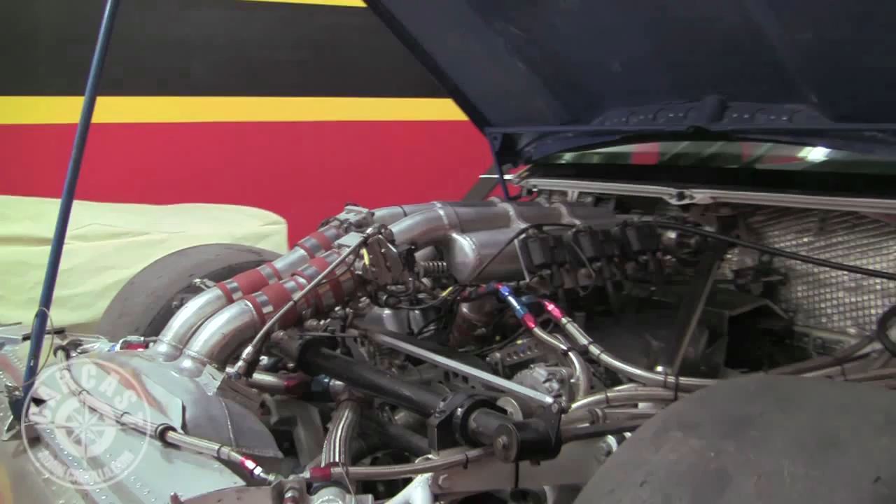It scares me because I'm picturing it start up. But you did a leak down test on it already, right? We did compression leak down. We wanted to get an idea of the condition of everything before we hammered the hell out of it on the dyno.

What do you think? How'd the leak down work? Compression's a little bit low. We have a lot of leak down on one bank. Passenger bank's got a fair amount. Wow, there's no passenger in the car. Well, as long as the driver's side is cool. Driver's side's in good shape.

Yeah, so the leak down works. I've never done a leak down. You take the plugs out. Yeah, we pull all the plugs out, open up the throttle plate, bring the piston to top dead center at the rockover point. We pump in 100 pounds of pressure, and it'll tell us the leakage. In this case, we had a few cylinders over 40% leakage. Then you determine if it's going past the rings, into the exhaust, or through the intake. At this point, we've got a little bit past the rings and mainly the exhaust, so we need some head work. So there's exhaust valve problems.

Yeah, I'd guess that mainly on one bank. Yeah, one bank's the worst. So if you were to give this engine a percentage, 100% meaning freshly built, rings tight, valves great, everything's great, what would you say this engine is at? I'd probably say you're in the 60% range.

60% range. Now how often do you test an engine and it's down like that? Nothing comes off 100% usually, unless it drives straight from the dealership. Even then you'll experience about 5 to 8% loss on a new motor. So I wouldn't worry too much about that. But it depends on how much it's raised, the RPMs, where it's set up, how it's tuned. There's a lot of variables that come into play.

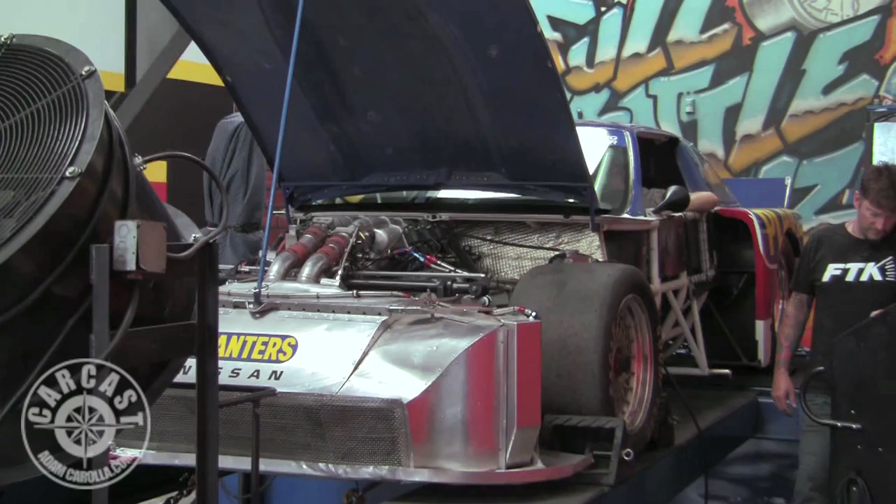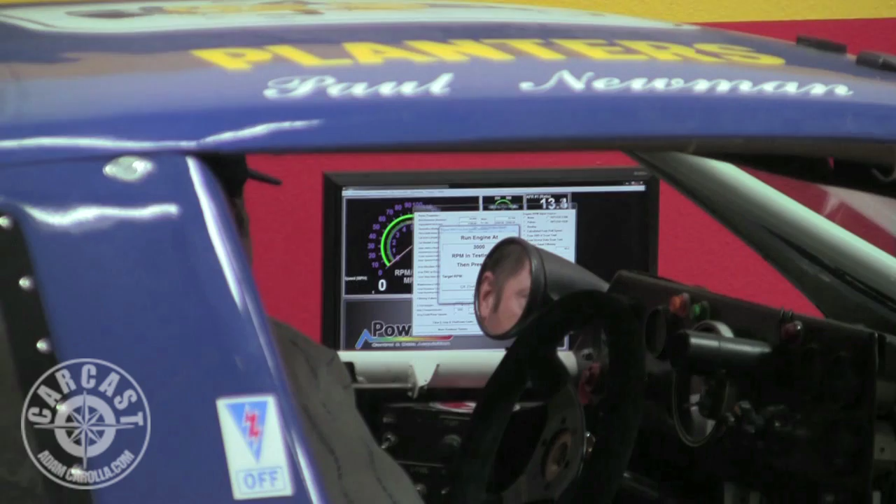It was acting rich, but it's actually lean at idle. That's why it fights you. You see it's 13 and a half, we should probably be around 12 to 1 right now. That's why sometimes when it's too fat or too lean at idle, it'll act the same way. Right now we can actually set it to 3,000 RPM.

I'm actually going to bump that to 3,500, so I want you to take it to 3,500 on your tach and hold it steady. Yeah, and then I'll lock it. By the time it comes down, the temperature will probably be good for a pull.

Well, you gotta drive it, fourth gear. What gear? Fourth. We're gonna match the two. Oops, the clutch is on the left side.

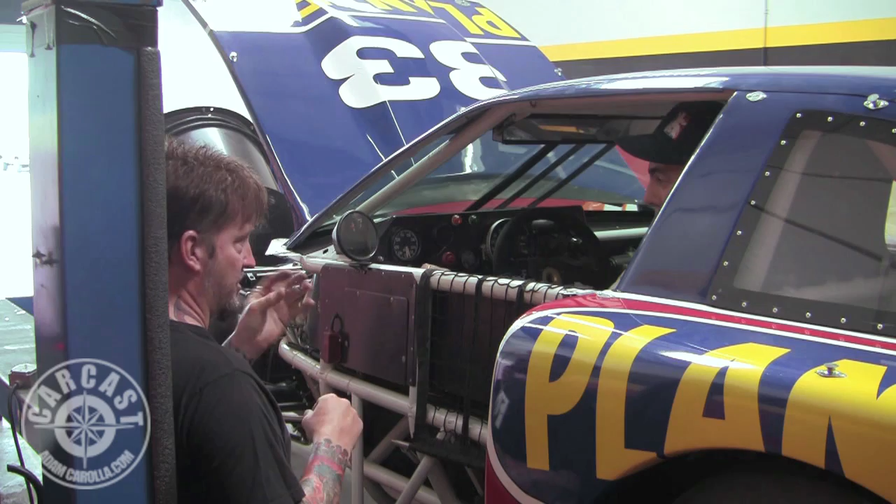It made 305 horsepower. 305, big numbers. We're going to run it to 7,500. Try to get it a little closer to 2,000, we started that one around 2,300. If we can get it to 2,000-ish, 2,100 with a little bit of throttle, I'll give you thumbs up, then you go wide open throttle.

Alright, let's try it again. Okay, you get going.

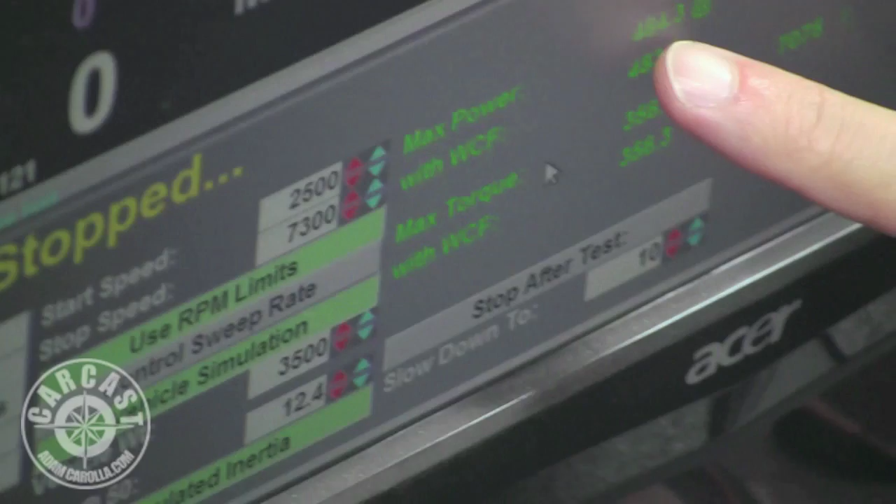If you look at your tune...

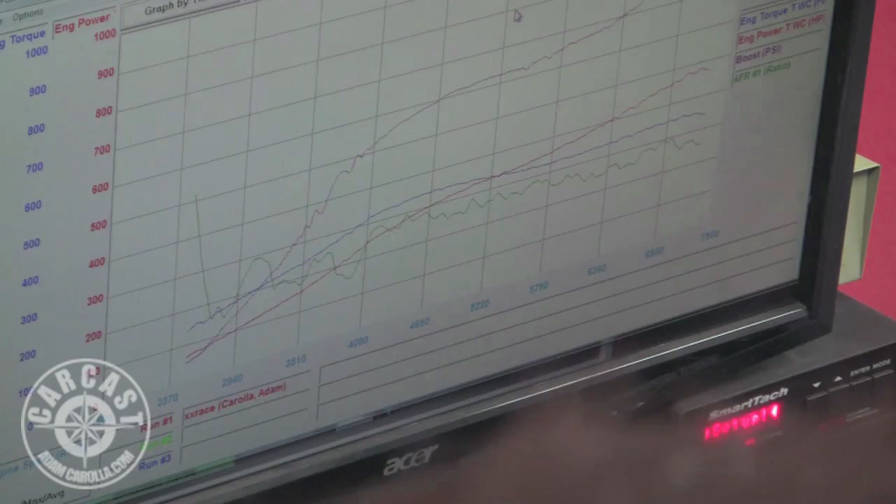See, I like to look at raw data. You can kick that switch off, there'll just be a little smoke in here. Fucking car, scary, right? It is. I don't mind it on the track, just standing in one place is scary. You feel like you're gonna launch right off of there. I don't know, it's disconcerting. It's all right, you got the chocks in? Little rubber chock, you're good.

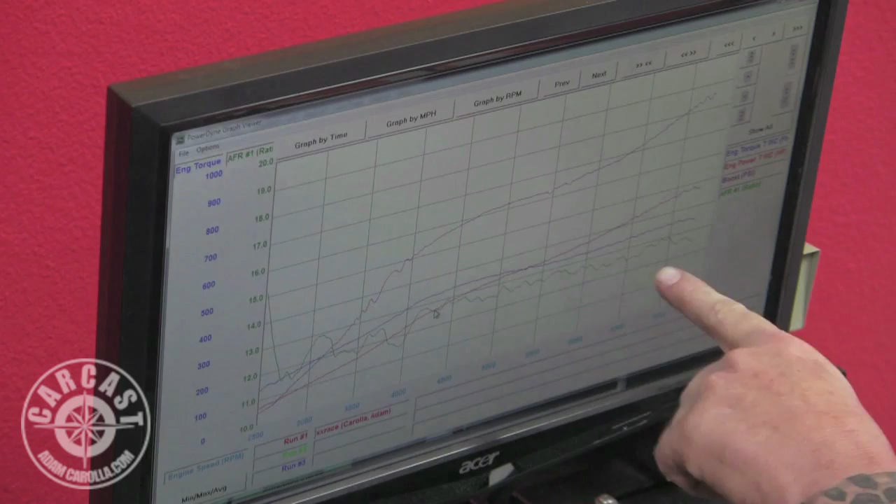So anything you see in magazines, they make it look better, looking at smooth lines. But being a tuner, you don't want to do that. You want to look at raw data because you want to know it went pig rich, went a little lean, pig rich, and this isn't all that bad. When you look at the air fuel ratio for the fuel you're running, it's not that bad. It peaks up a little lean here, but overall from 4,500 up it's not that bad. If you look at horsepower and torque, they're pretty flat considering it's raw data.

The whole bottom end was crazy lean. You can see when you initially get in it, it spikes up to 15%, 15 to 1 air fuel ratio, and then it goes down to about 11.5, 11.6, around that area. So it's lean then rich, that's why it's fighting you in the beginning and you have no bottom end.

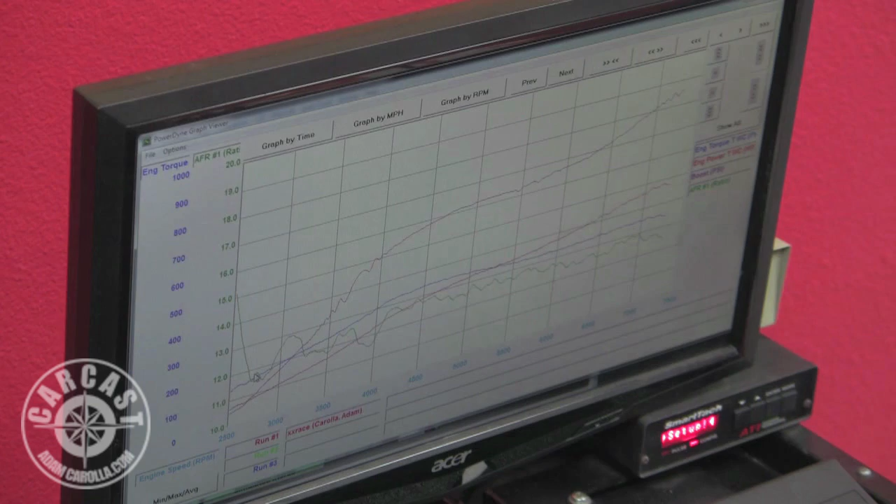I expected to see spikes in here a lot of times, but the curves are actually pretty smooth considering. It's a little better than I thought it was going to be, considering the leak down test and the results of that.

All right, so 610 is staying in the garage. There you go, you can run it. I feel like you'd be a good dentist, like where you just go, all things considered, it's not that bad. I mean, it'd be nice if you flossed a little bit, but it's not that bad. Toothpaste would be nice, I expected maybe some worse, certainly, just by the smell of things.

So is there anything, is this engine not worth tuning because of the condition it's in? To be honest with you, right now we don't know what the timing is. We could dial this in a little bit better, but I really don't want to push it, being as we have bank-to-bank issues. Overall, honestly, I'd probably run it the way it is. It's been consistent for you, so you know how it feels.

You just gotta fight that bottom end a little bit, throw some more revs at it. But yeah, I just hate it. I hate the guy standing next to your car in the pit and the paddock, got his kid with him, and you fire it up and cover him in smoke. He's like, 'Wait, come on, I got my kid with me.' Yeah, so good, we know what it's doing.

I got to tell you, it's so hairy. I can't imagine what it's like with a car that has 1,200 horsepower or something on it. Believe it or not, you'd think it'd be a lot crazier, and it's not. Because what ends up happening, especially with the big turbo cars putting over 1,000, we actually have axle straps to pull the rear end down. It depends a lot on the tire, but if the tire doesn't spin, it just ramps really quick, pulls, and then all of a sudden it's like you let it off.

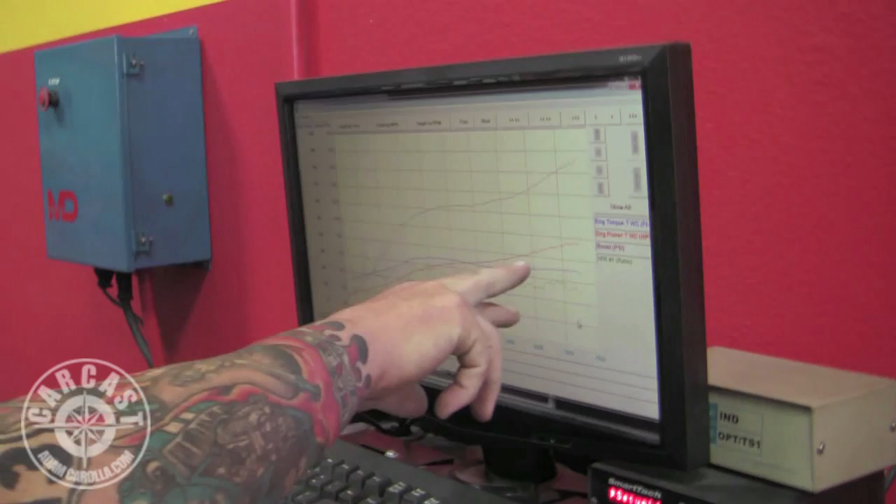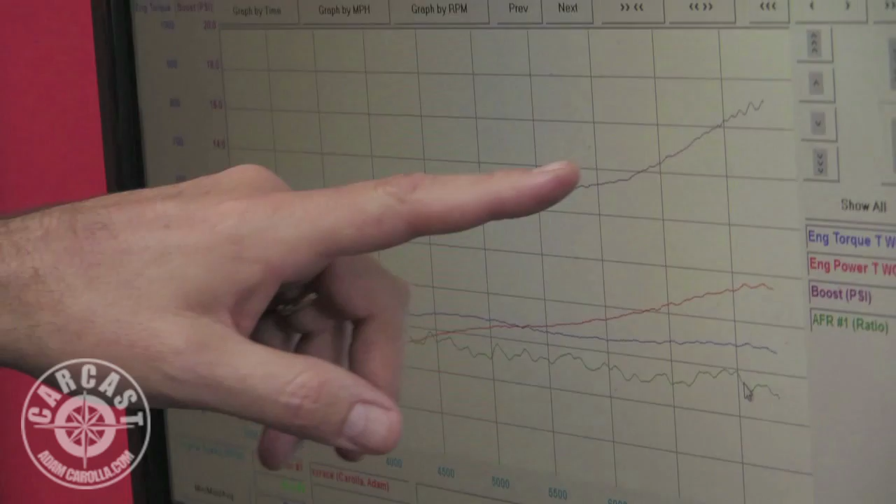When you look at it, it pulls right to red line. If we saw a situation where horsepower was falling off and torque was falling off, you'd say, well, shift it at 67 because you're losing it after that. But this is pulling through to 73. This right here is your boost, the red is your horsepower, the blue is your torque, and the green is your air-fuel ratio.

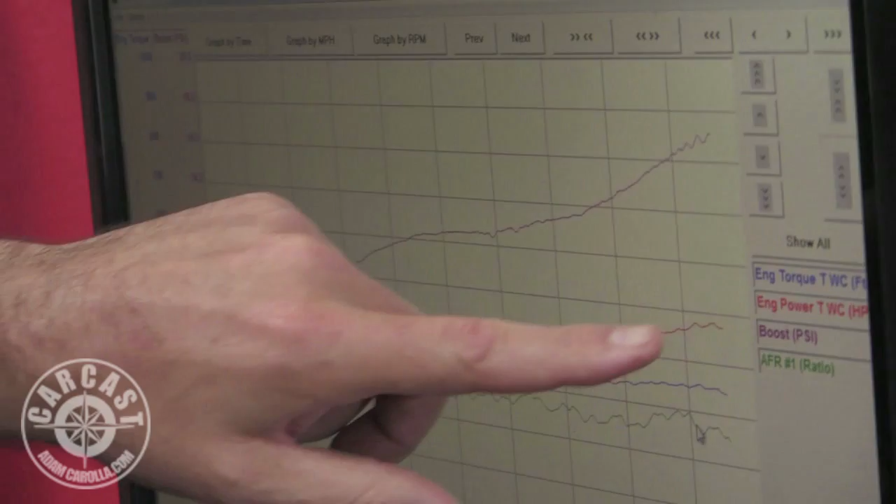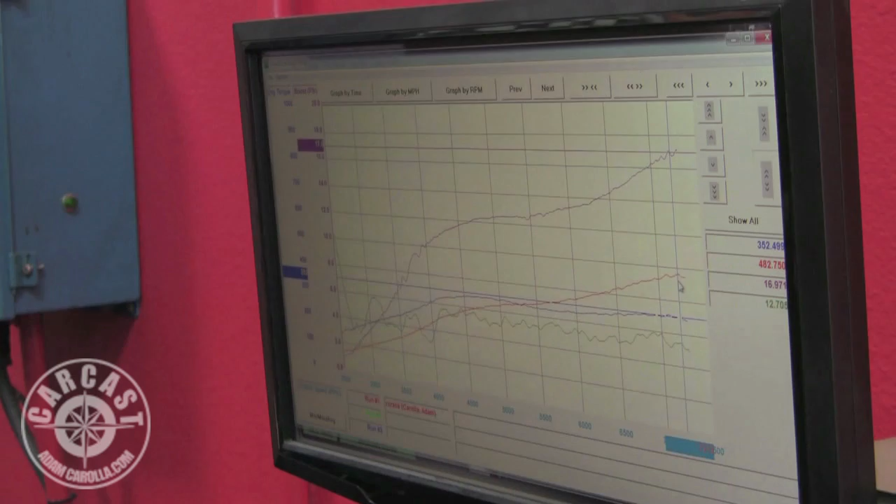Is that just the little flattening out there, is that hitting the rev limiter? No, that's just the point where you're not making any more horsepower past this. Beyond 72, I wouldn't run it, not worth it. I think that's when the shift light comes on.

So that's the nice thing about having a dyno, because when you do a pull in 1-to-1, you're getting raw data, so you can see exactly where your shift points should be, where your torque starts to fall off, where the horsepower falls off, and as long as your air-fuel ratio is good, then you know where it's at. Like I said, the downside is we didn't hook up a laptop to know what our timing is throughout this pull.

Well, I'm scared. Thanks, Ray, that's awesome.